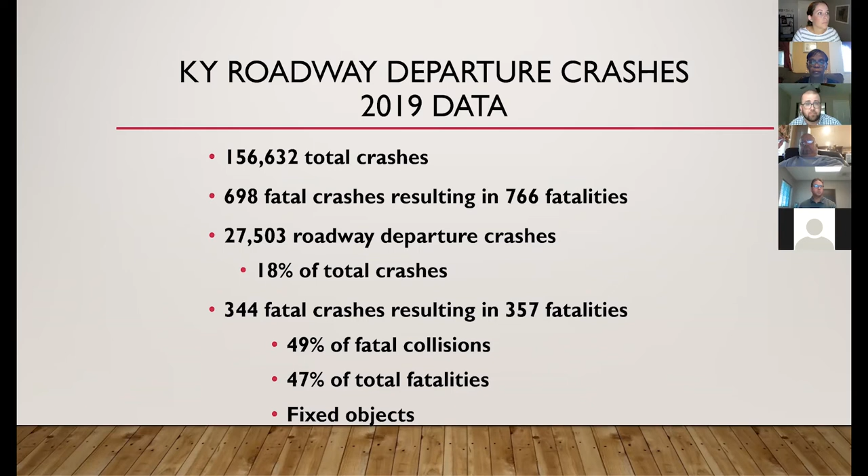However, 344 of those roadway departure crashes resulted in the loss of 357 lives. This accounts for about 49% of the total fatal collisions, as well as 47% of total fatalities. So this shows we have an overrepresentation of roadway departure crashes here in Kentucky. The number one thing people run into in a roadway departure event is a fixed object. These crashes are generally more severe because people are colliding with fixed objects.

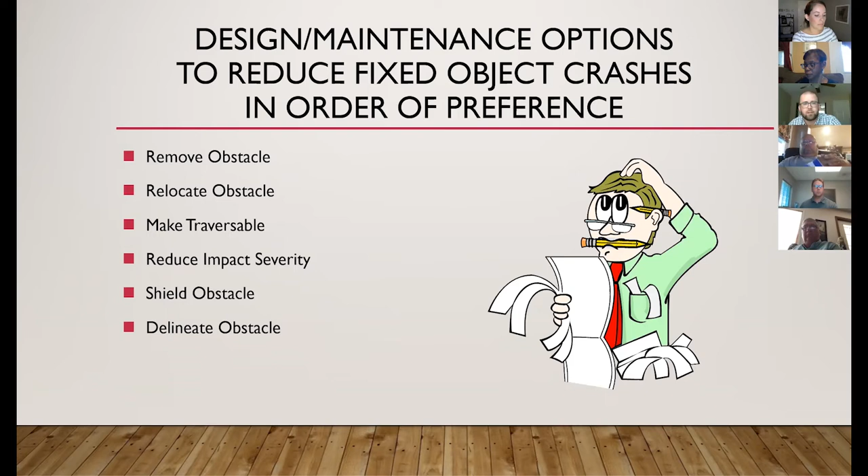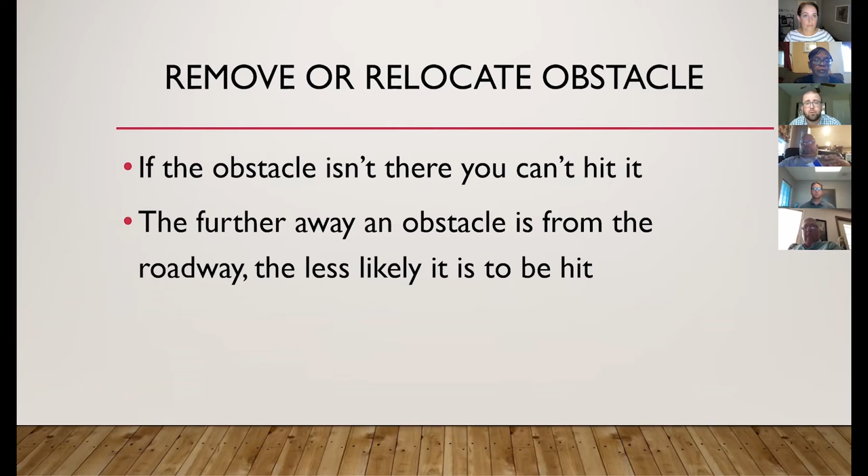So we have to do something to help with that situation. Here's some options we have to reduce those fixed object crashes, in order of preference. We're going to go through each one. First is remove or relocate the obstacle. Obviously simple and straightforward: if the obstacle isn't there, you can't hit it, so it won't be a problem anymore. And the further away you move an obstacle from the roadway, the less likely it is to be hit.

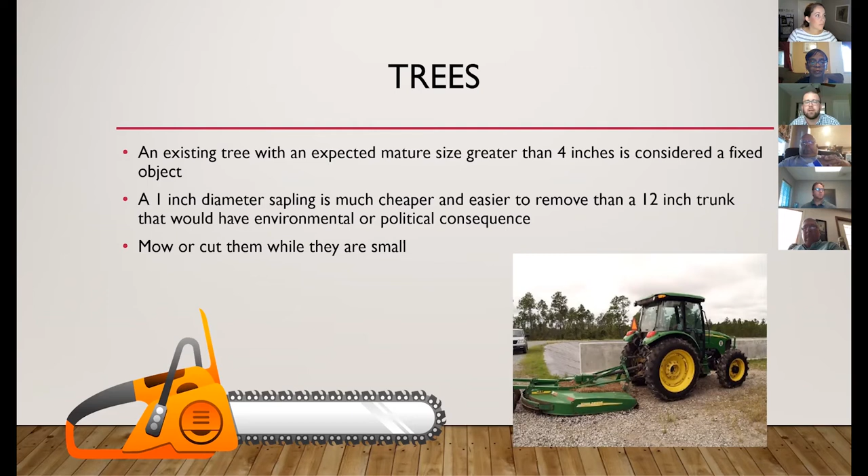What's the number one object that we hit here in Kentucky when we have a roadway departure event? Our beautiful trees that line our rural roadways. An existing tree with an expected mature size greater than 4 inches we consider a fixed object. Obviously, when you have a 1-inch diameter sapling, it's much cheaper and easier to remove than when that tree becomes a 12-inch trunk that may have environmental or political consequences.

So our recommendation, as well as KYTC's, is to mow or cut them down when they're small and it's no big deal. The next option we have is to make the roadside traversable. If there's got to be an obstacle on the roadside, build it so an errant vehicle can traverse over the obstacle without snagging or overturning. The general rule is if it's taller than 4 inches, it could be a snagging issue, and you need to either remove it or make it shorter than 4 inches.

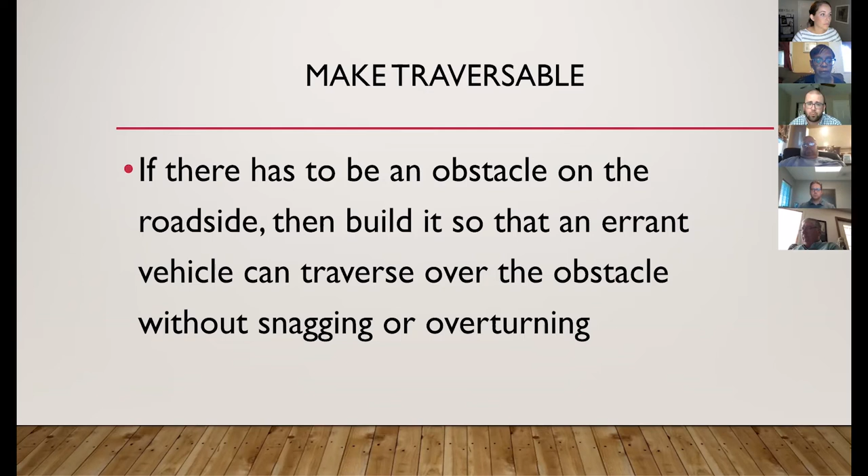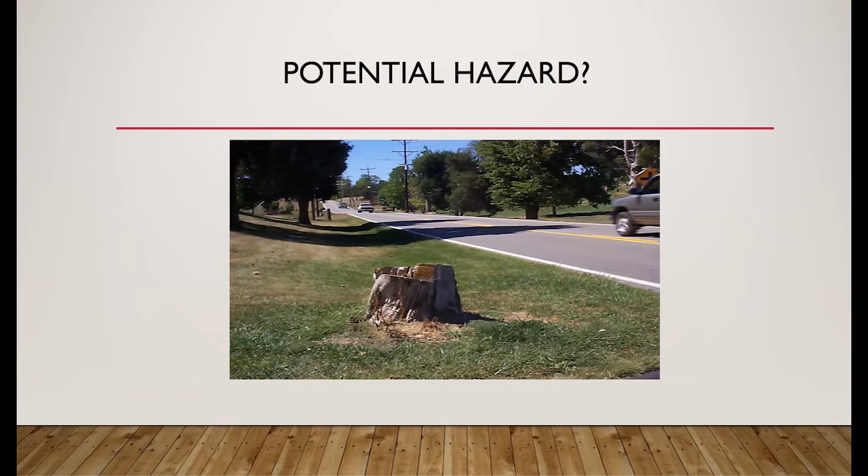We all have these on our roadways. We'll have a large tree that we want removed, and we need someone to come out and do that. When they do, hopefully they don't just leave a stump like this, which is much higher than 4 inches tall, still leaving a potential hazard on your roadside. If you remove a tree, be sure to grind the stump down to less than 4 inches in height.

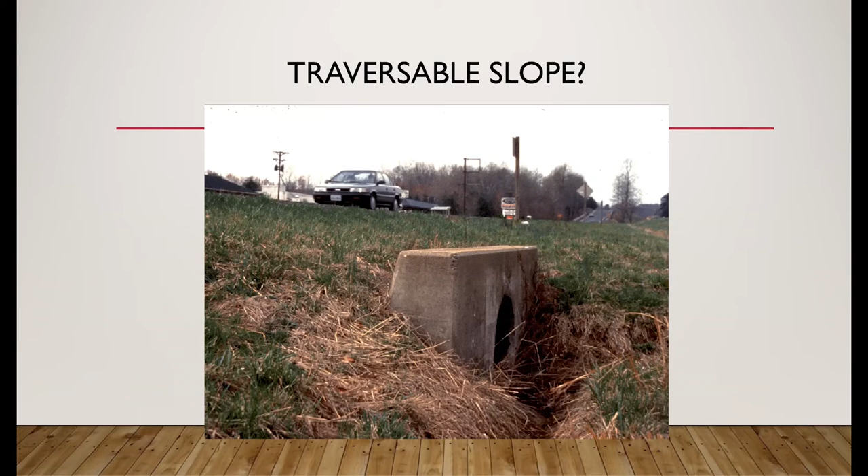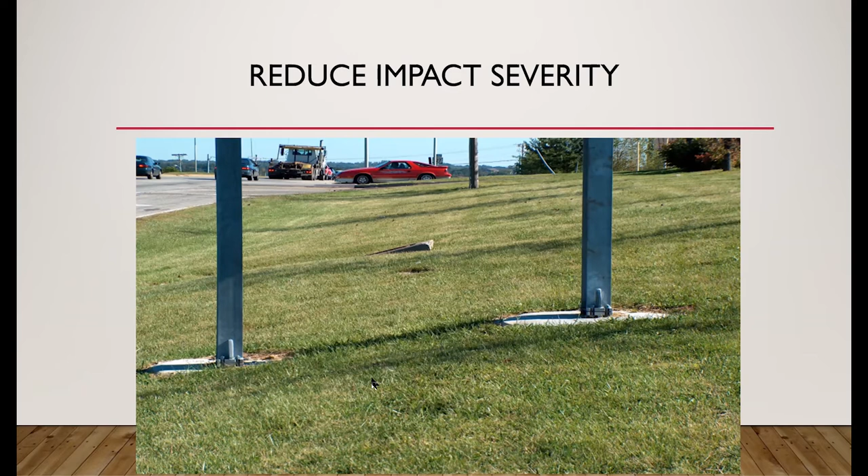But then you have this problem right here in the middle. If I move my cursor over it, you have a head wall right there behind it that looks to be taller than 4 inches. So you may be able to reduce the impact severity, but also look at the roadside as well to see if there are other things you need to do to make things traversable.

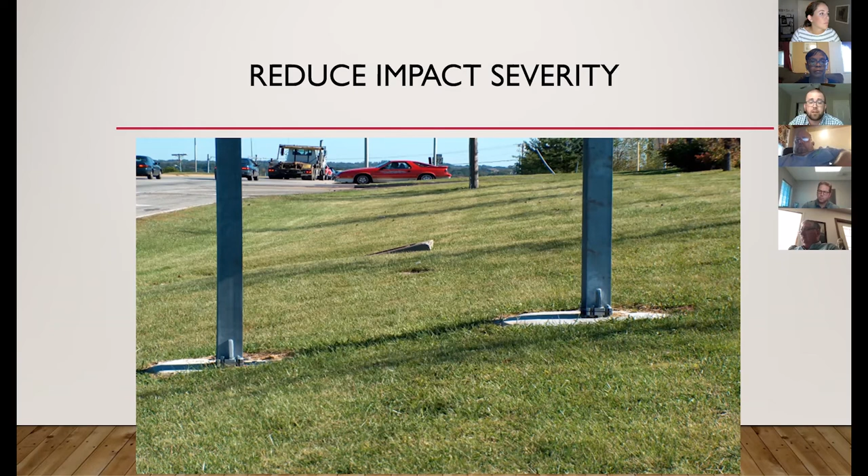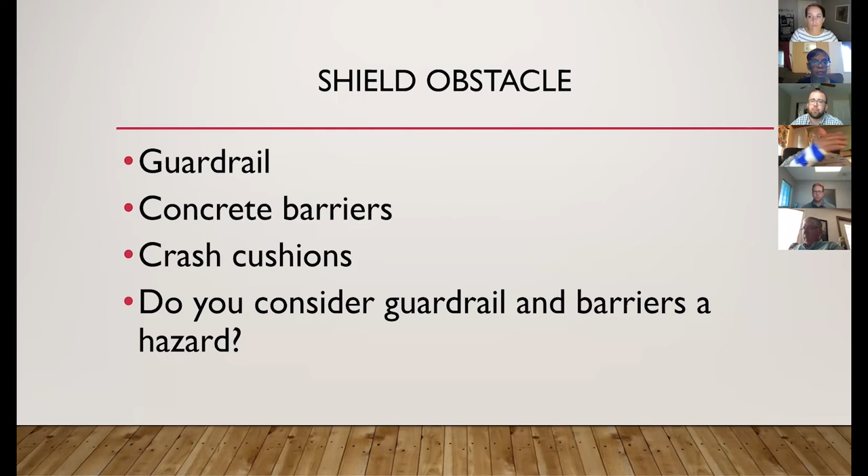The last option, if you can't do anything else, is to at minimum attempt to make the object more visible by putting a marker on it or some form of delineation.

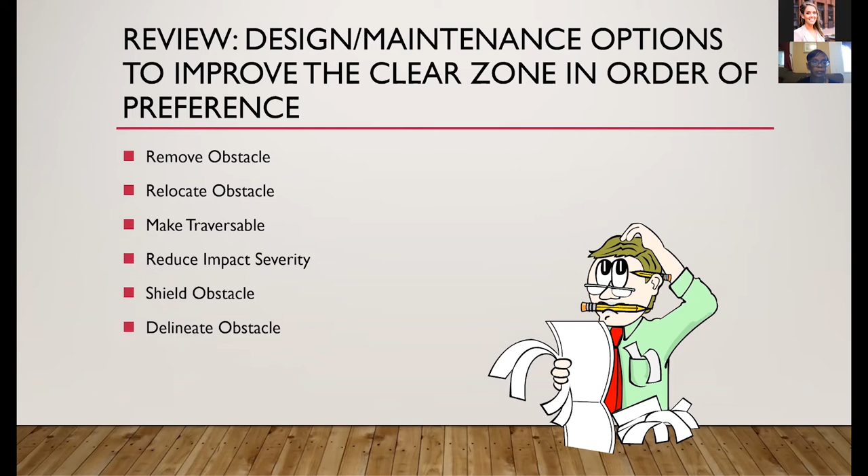Now, thinking about using barriers, one of the most important things when you're using barriers is to ensure that the distance between the barrier and the hazard is the distance that you need. And that's based upon what type of barrier you're using and what you're actually protecting.

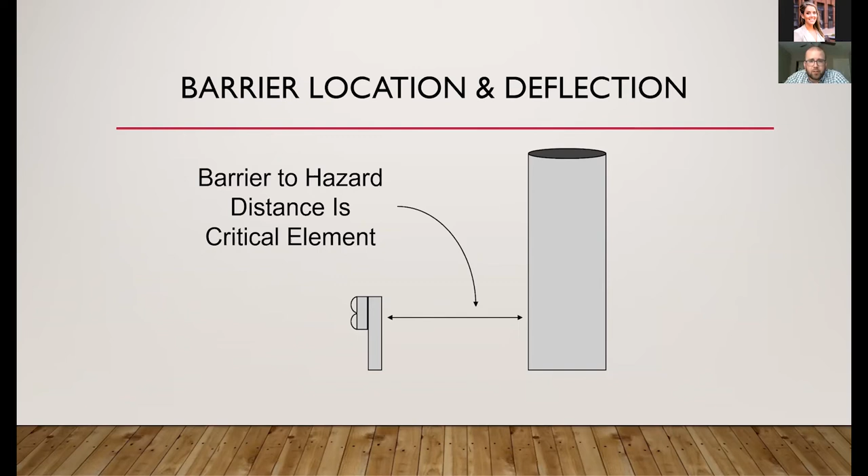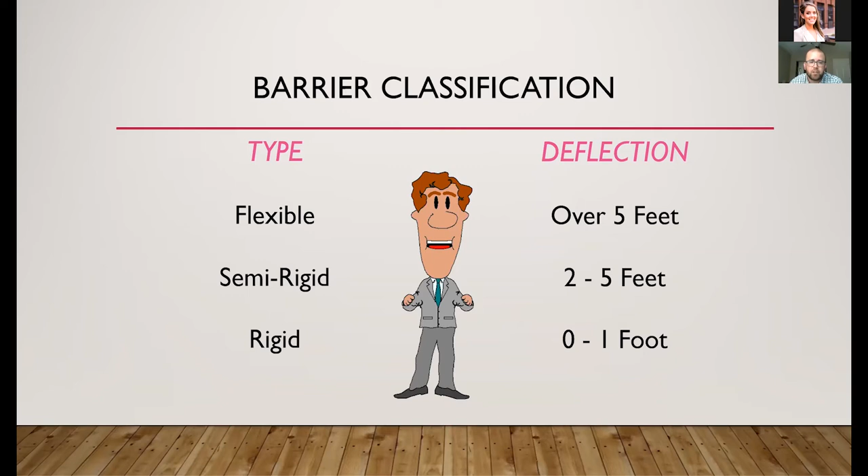So each barrier has a different deflection. These are the 3 types of barriers commonly used here in Kentucky. A flexible barrier has a deflection over 5 feet, sometimes up to 12 feet. A semi-rigid type has a deflection of 2 to 5 feet. A rigid type has a deflection of about 0 to 1 foot.

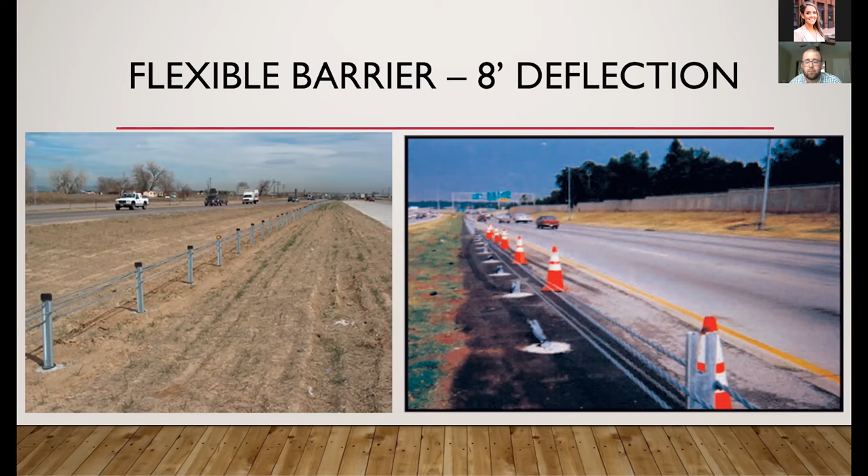Here's an example of a flexible barrier that everyone on our webinar has probably seen across the state of Kentucky. This is our cable barrier. We have this in the medians across the Commonwealth and on lots of our interstates, as well as some of our parkways. Here in Lexington, where I live, we also have it on New Circle Road. It's very common, with a design deflection of up to 8 feet, sometimes 10, sometimes even 12. So that's something to be aware of if you're looking to use that.

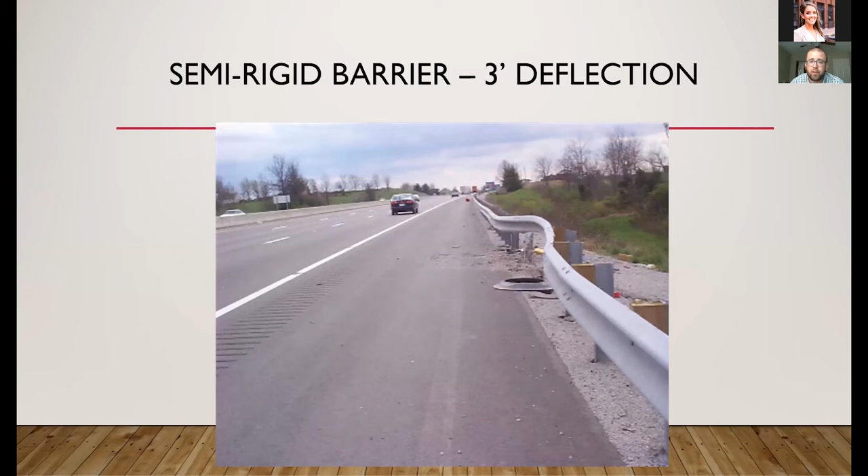Semi-rigid barrier is what we call our W-Beam barrier. Our standard W-Beam barrier has a deflection design of about 3 feet, so we need to be aware of that when using it out in the traveled way. And last but not least, the rigid barrier, which is our concrete barrier behind our crash cushion here, has a deflection of about 0 to 1 foot. So that's very rigid and not very forgiving.

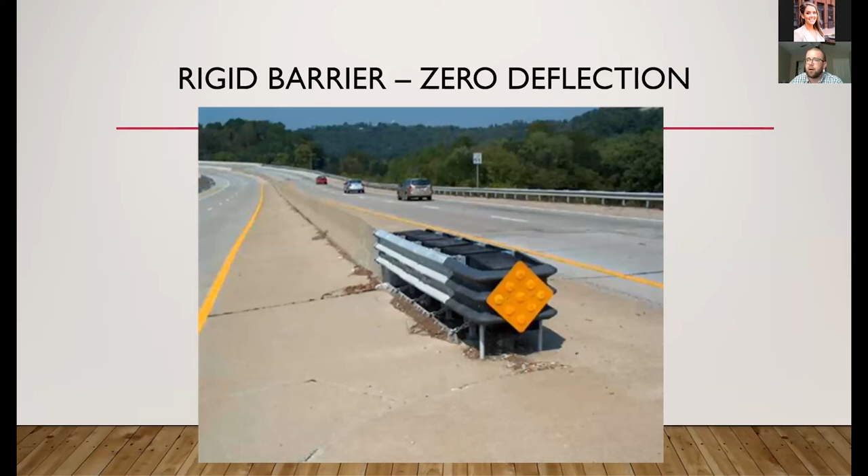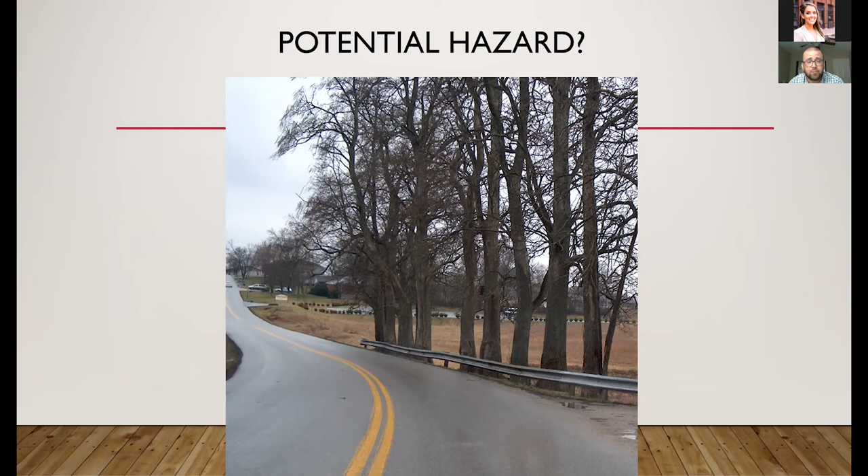Now thinking about all these deflections we just talked about, can anyone see a potential hazard in this picture? It's probably a little difficult to see, but we have a string of guardrail right in front of a line of trees. If the trees are immediately behind that guardrail, which appears unanchored and not a very strong string of guardrail, it may actually deflect more than the 3 feet we designed for. So if someone hits that guardrail and it deflects, it may deflect right into those trees, causing a severe crash or maybe a fatality. Obviously, that's not what we want.

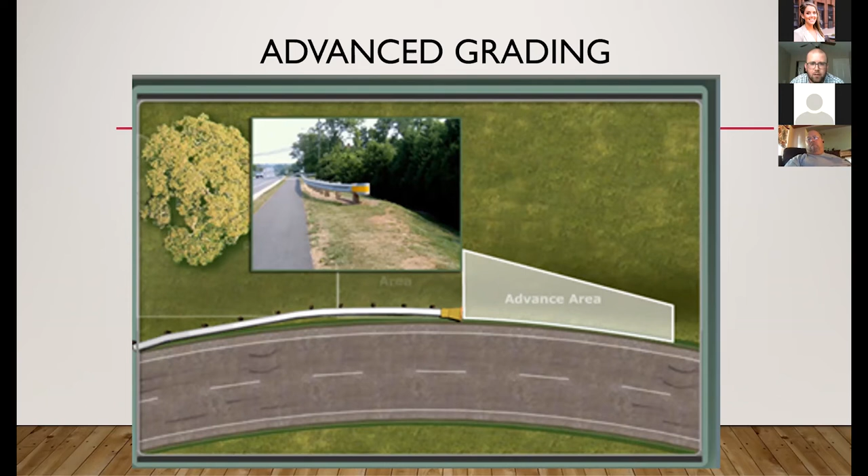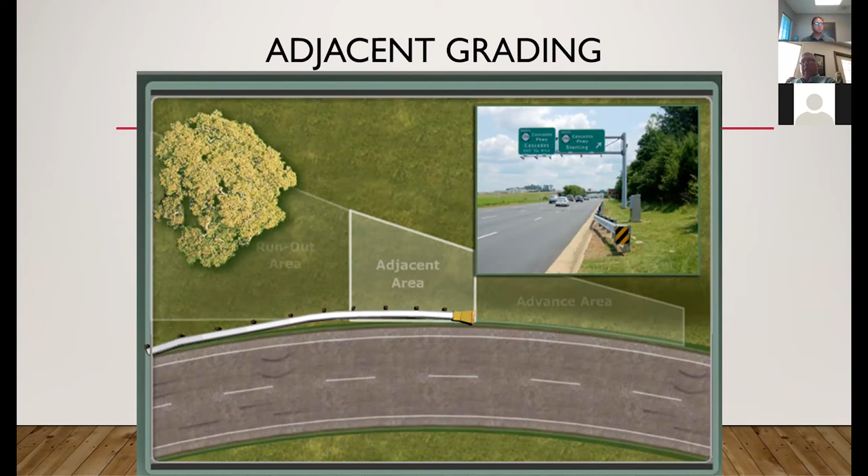Now, adjacent grading refers to the area on which the terminal is installed and the area immediately behind it, as highlighted here. Ideally this area should be essentially flat as well, 10 to 1 or even flatter, so the terrain itself does not increase the vehicle's roll, pitch, or yaw upon impact and interaction with that terminal. You want to make sure that's as flat as possible.

Hey Ryan, yes? Comment in the chat here. Okay, David says: we have observed Alabama DOT utilizing quick deployment water-filled barrier to shield damaged guardrail sections until crews can mobilize to repair the damaged guardrail.

Would KYTC be open to exploring this quick and temporary positive protection mitigation method? That's a very good question. I've seen across the country many different states that do very similar things. Indiana does something similar as well. I'm not sure about Kentucky's stance. Right now I think what they currently do is put out some orange barrels, just to delineate the situation and make sure people know there's been a guardrail strike there, and the guardrail may not respond in the way it's designed to. I can speak with construction as well as maintenance about that and see if they have any thoughts on that, or if they've been interested in the past. That's a good question, I'll look into that. Thank you.

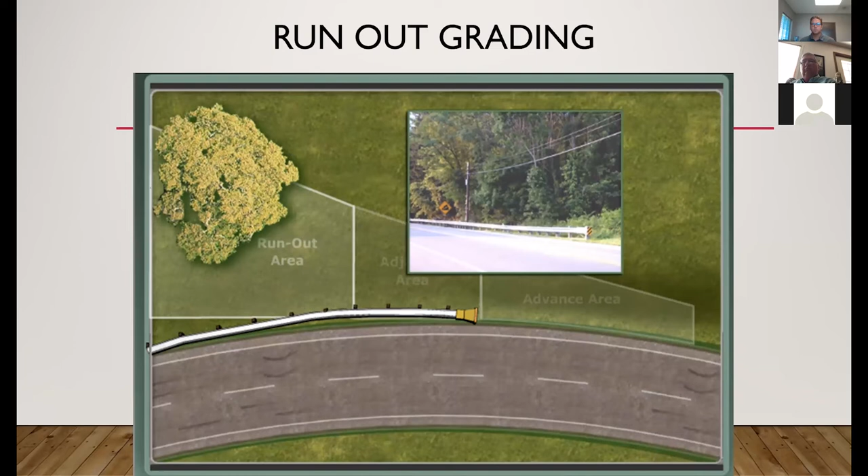Looking again at the runout grading, this refers to the area into which an impacting vehicle may travel after breaking through a gating terminal. If they strike the terminal within the first post or two, the design allows it to gate and open up, letting them travel safely behind the string of guardrail. The physical extent needed varies depending on vehicle size, speed, impact angle, driver reaction, terrain character, and terminal type. You want this area to be as large, flat, and free of objects as possible, because you never know which type of vehicle will hit your guardrail.

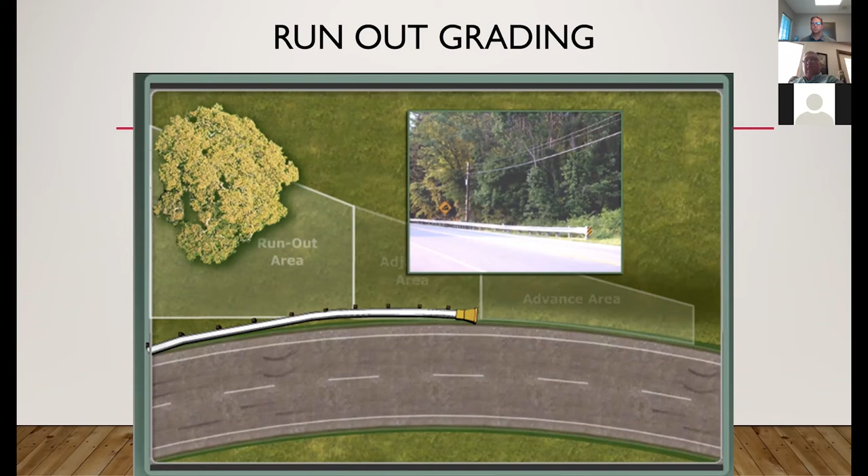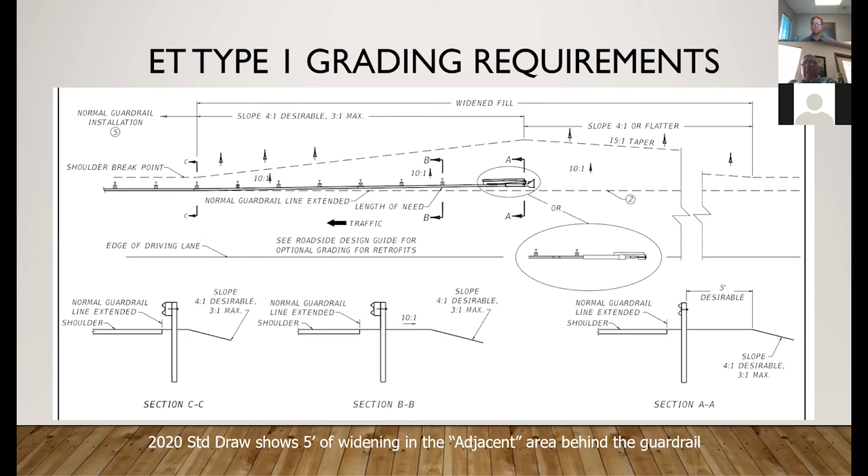Looking at the grading requirements for the end treatment type 1, the tangent end treatment terminal for KYTC, this is their standard drawing. In the advanced area, you have your 10-to-1. In the adjacent area, you also have 10-to-1. And in the runout area, it says desirable slope 4-to-1, 3-to-1 max. Making it 4-to-1 means it can be recoverable. 3-to-1 means it's traversable but not recoverable, so it should not cause a vehicle to roll over or cause another crash.

Same for type 4. You have 10-to-1 in your advanced, 10-to-1 in your adjacent, and again for your runout, 4-to-1 desirable, 3-to-1 max.

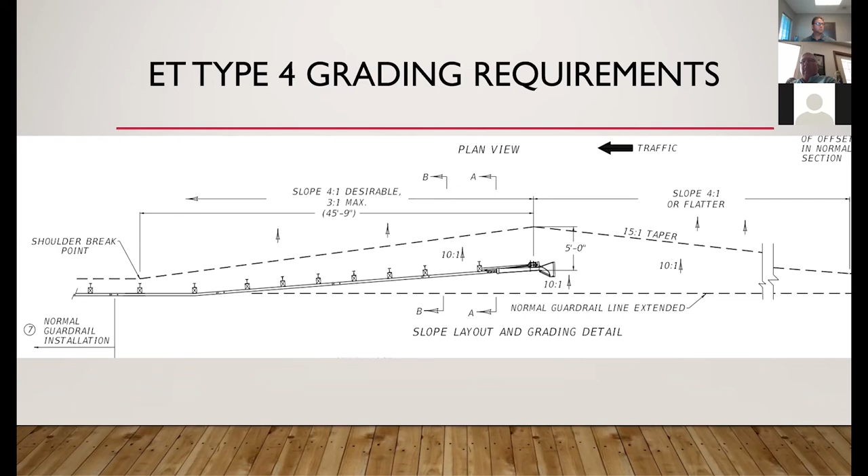Now, a lot of questions I've received from other people who went through similar training with me: there are lots of places across the state where we cannot get this grading. It's very difficult in mountainous areas and areas without much shoulder, where you go directly into a ditch. So the question is always, what should we do in that instance? The answer is just do the best you can. You want it as close to the design and standard drawing as possible, but it's understandable if it's not entirely able to be built up that much. You just want to do the best you can with what you have.

Now looking at the minimum length of guardrail, there are several statements across many different standard drawings for KYTC, and they all have a similar note: minimum length of guardrail, including the end treatment preceding a fixed object, is 200 feet. Why 200 feet? Because guardrail needs about 100 feet of anchored rail to build up enough tensile strength to withstand a crash. So the thought process is, when you have 200 feet, you could strike that guardrail anywhere and have at least 100 feet in one of the two directions, upstream or downstream, that would be able to withstand the crash. That's why we have 200 feet.

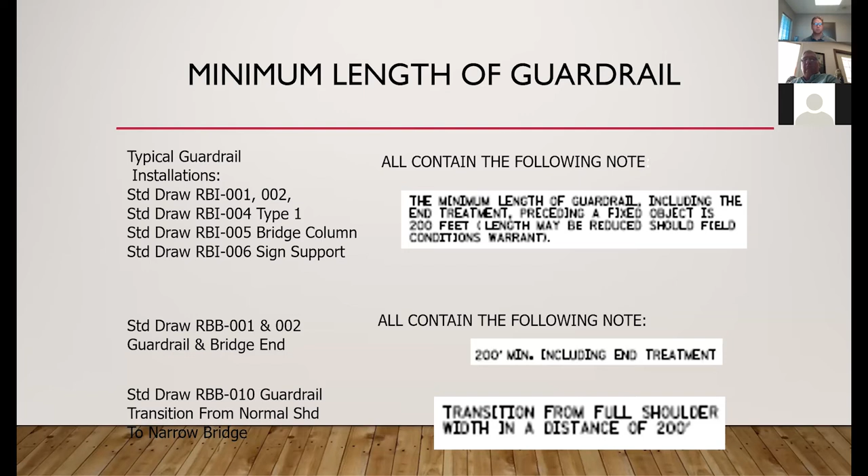I highly encourage not only KYTC to continue following this, but other jurisdictions as well. You need at least 100 to 200 feet to withstand a crash.

Now, looking at our end treatments, there's an order of preference of guardrail end treatments that KYTC uses. The first or most preferred is the type 3, barrier anchored on the back slope, or the type 2, which is barrier against a solid rock face. These eliminate end-on impacts. They're both generic, non-proprietary materials.

The next preferred is the flared end treatment, the type 4A. It's flared away from traffic and is a gating end treatment. The last is the straight line or tangent end treatment, the type 1. It's energy absorbing and closest to the roadway.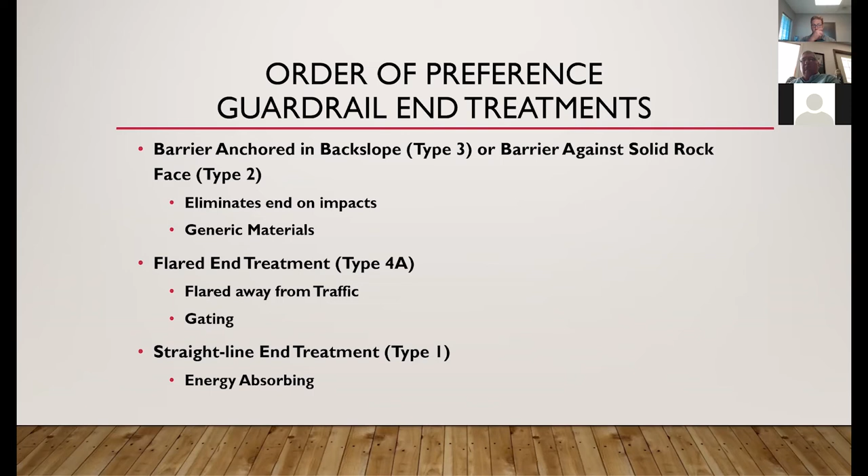The reason these are in this order: the ones on top are furthest from the roadway, meaning they're least likely to be hit and least likely to need regular repair. A type 1 is sometimes only a few feet from the edge of the shoulder, while a type 3 or type 2 could be up to almost 50 to 100 feet away from the shoulder edge. That's why these are preferred—they're much easier to maintain because they're further from the roadway and won't be hit nearly as often.

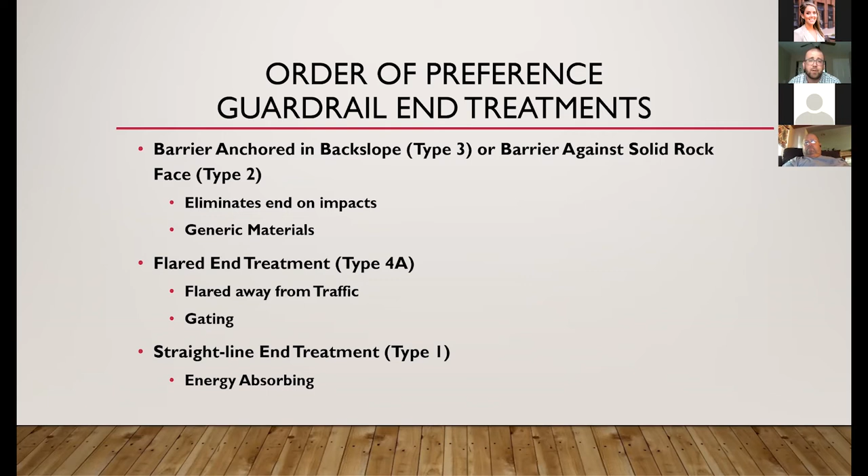With that, I think we had a poll question here, Nicole. I don't know how to see those answers, Nicole. You want the question? I'm sorry. I'll share the results with you once they're done. Can everybody see the poll question? You're talking about the MASH question? Yes, on question 1. Oh wait. Janet? Here we go, I can see it. Okay.

This is the next thing we're going to talk about, MASH. It's the Manual for Assessing Safety Hardware, and it's new requirements that we have for crash terminal or end terminal crash testing. So I kind of wanted to gauge everyone's experience with that, if they've actually heard of it and have used it or looked into it at all.

Okay, so we've got a lot of people that have at least heard of it. This is good, this gives me a pretty good idea. So we've got 2/3 of the people have at least heard of it. So that's good, I can work with that. Thanks, Nicole, for putting that up there. I appreciate that.

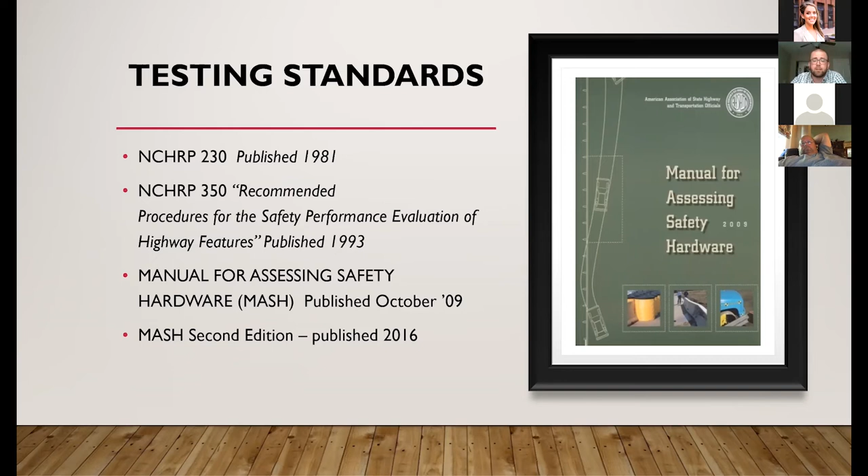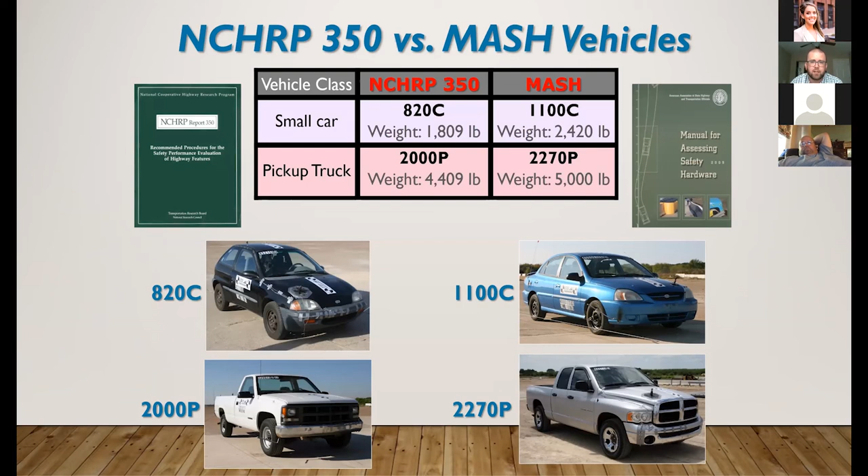On your screen now, you should be able to see a slide showing the difference in sizes between the small car and the pickup truck for NCHRP 350 testing versus the new MASH testing. As you can see, the vehicles on the left for NCHRP 350 are much smaller, they weigh less, they're closer to the ground. The vehicles on the right, even the passenger car, are significantly larger and heavier, as well as the pickup truck. The pickup truck is now a 4-door pickup truck, as opposed to 350 which was only a 2-door. So that's another major change as well.

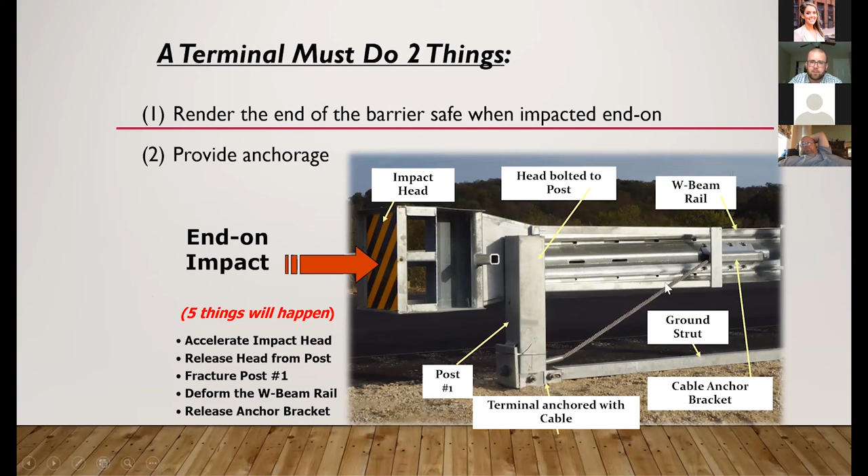So the big question, what are we testing when we do these crash tests? When we crash test an end terminal, we're making sure it does two things: render the end of the barrier safe when it's impacted end on, and provide anchorage. Anchorage gives it the additional strength, provided by the cable you can see in this picture down here. This is called the terminal end cable.

Test 34 is your critical impact point test. This is where it's striking right near the end terminal, not head on, but at a 15-degree angle. So this is going to test the ability for the end terminal to gate and what happens when the vehicle hits it that close to the end terminal.

Test 35 is a 25-degree angle that's striking at the beginning of the length of need. This is really testing your anchorage, the strength of your system, the strength of your end terminal.

Test 37 is the opposite direction strike at a 25-degree angle as well. It's testing what happens when it's struck in the opposite direction. Will you have any snagging? Will you have any issues? What will happen?

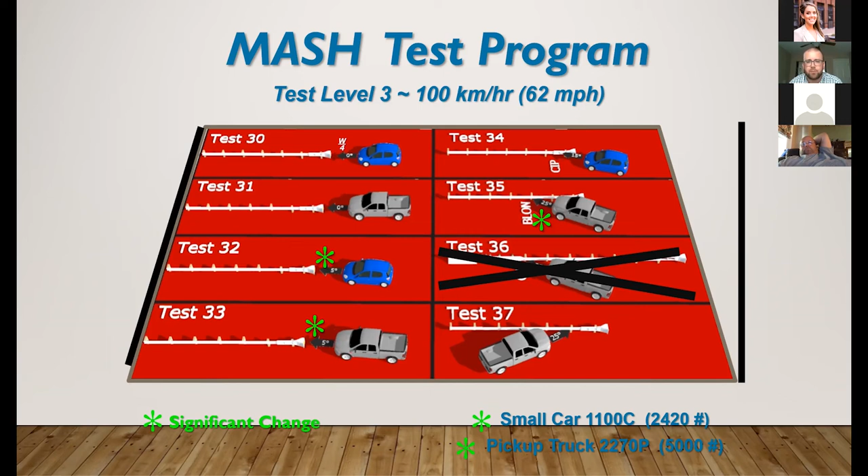It did not cover existing master agreements or maintenance efforts that were underway at that time. However, the implementation agreement did strongly encourage state DOTs to upgrade or replace their damaged hardware with MASH-approved hardware through maintenance and state force efforts.

Now, I know this is only specific to state DOTs, and I know we have other jurisdictions, locals, and others on our webinar today. What I can stress or encourage you all to do is to upgrade your guardrail as well, so that we have similar systems between the state system and the local system.

We know that along several roadways across the Commonwealth, we have guardrail that's rather low or that has been used past its useful life. If you have any guardrail like that in your jurisdiction, I recommend reviewing it to see if it needs to be upgraded.

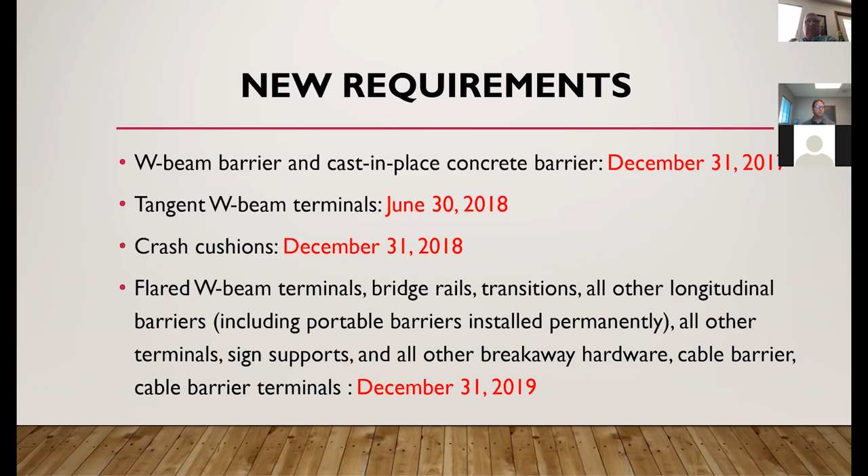This simply means there are new testing requirements, and if your guardrail is at least 27 inches in height, it probably is still working the way it is designed to do. That is based on the Highway Design Manual, and the Roadside Design Guide makes that same statement. So if it's at least 27 inches tall, it should still be able to function the way that we need it to function.

Federal Highway started to track how well states were working with these new implementation dates. As you can see, as the implementation dates got later, there were many more issues with state DOTs, whether or not they felt they were going to be able to meet those sunset dates. The last sunset date of December 31st, 2019, which covered everything else not covered in previous sunset dates, states had the most issue with.

So there were lots of questions that came out from that.

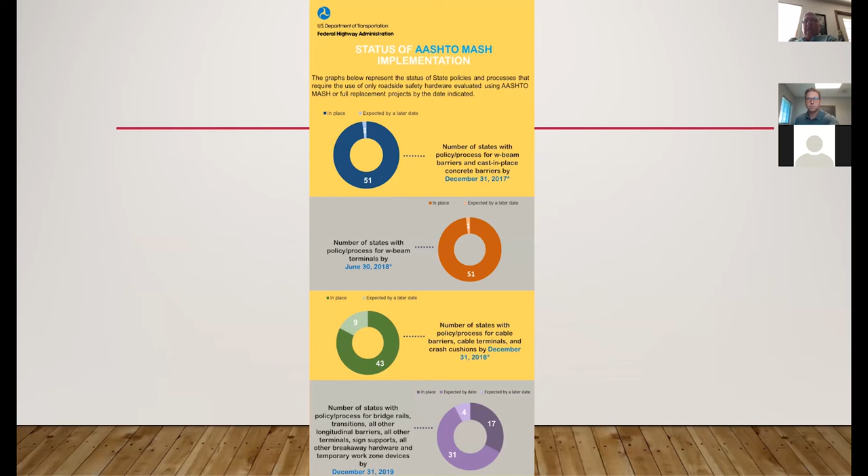Because there were so many questions and concerns, there was actually a Q&A website put together by AASHTO. This gave state transportation authorities the ability to go to a website to look up their concern and ask more questions. You can also submit questions through this website. It gave them the ability to find out what they should do in their situations.

With that sunset date, December 31st, 2019, the major issue many states had was a very limited number of MASH 2016 compliant devices available in several of the listed categories. Some of the existing compliant devices may not actually meet the requirements and needs of the transportation authorities. So AASHTO and FHWA worked together and created some exceptions to allow some MASH 2009 compliant, as well as NCHRP 350 compliant devices, to be used in their place.

I had a question to ask here, and I think we have enough people aware of MASH, so we could ask this question. So Nicole, if you have that question available, would you mind asking that for me?

Right, let's see here. Oh, wait.

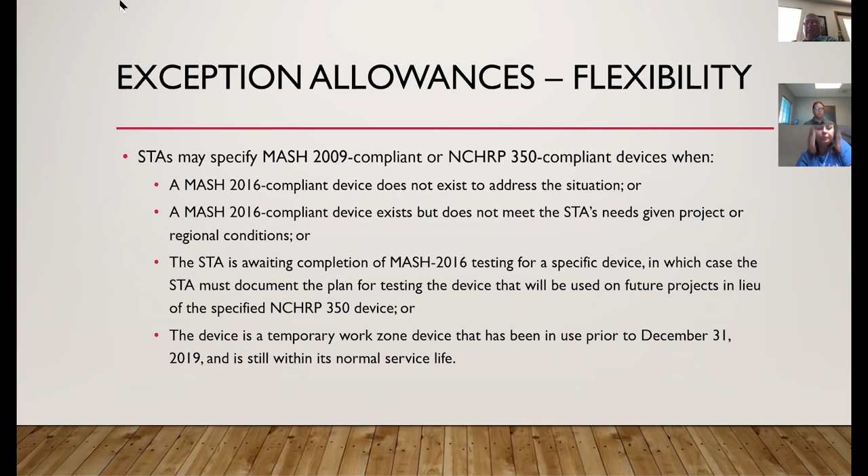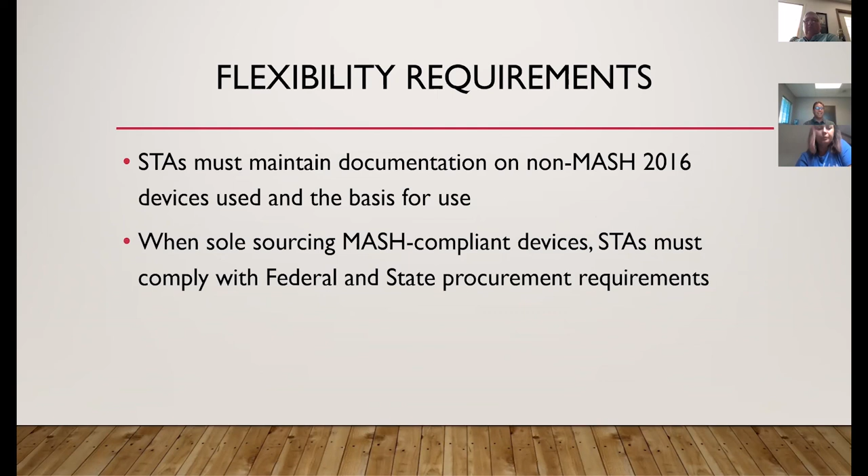Let's go back to our presentation. Along with that, there were some requirements that came with these flexibilities regarding required documentation and other things people have to do when using MASH 2009 or NCHRP 350 devices. I'll make sure everyone can get a copy of this presentation if they want it so they can see all this information.

So let's get into what KYTC did in response. How did they respond to these changes with MASH? The first thing they did was send out a state highway engineer memo in November of 2017, where they made the decision to switch from their strong post W-Beam Guardrail system to using the Midwest Guardrail system.

Midwest Guardrail system is rail that is at 31 inches high. KYTC's old standard was at 29. It has a 6-foot post length, spaced at 6'3", the same as KYTC's previous strong post W-Beam system. It has 8-inch offset blocks instead of 6-inch, meaning your posts are 2 inches further away from the roadway and vehicles, giving a lesser chance of tires and wheels snagging on guardrail posts during a crash.

The splice location changed. The splice location is where the two panels of guardrail connect. On the old strong post W-Beam system, they did that at the post, which created the point of greatest strain and stress at that location, weakening the system and making it more likely to tear there. Changing the splice location to mid-span instead of at the post makes the system stronger and gives it greater ability to withstand crashes.

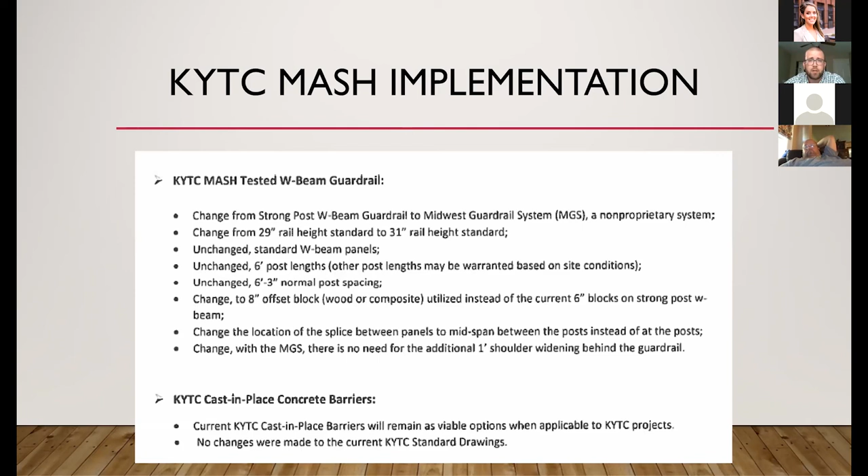The Midwest Guardrail system also does not have that requirement for an additional 1-foot shoulder widening behind the guardrail. So it's a stronger system and gives greater strength when you have a crash.

These are some of the reasons I just went over: mid-span splices, reduced post embedment, meaning you don't have to spend as much time on installation or drilling posts in. Increased mounting height, now up to 31 inches instead of 29. Increased blockout depth. The standard design can be used in a wider range of applications, not just your standard situation. When you have different situations with curbs and other things, you can just use your standard design without changing anything.

Also, there were current end treatments already in place that KYTC was familiar with, which they could use with the Midwest Guardrail system as well.

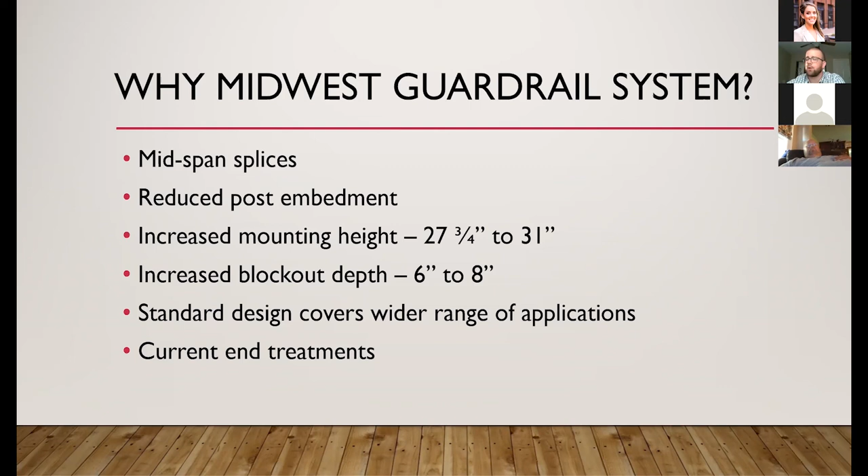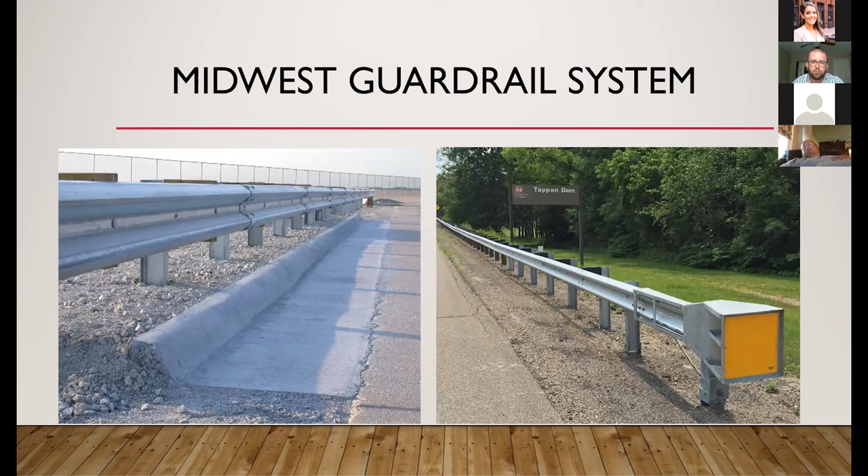Here's a couple pictures of the Midwest Guardrail system. The picture on the left shows one of those applications where it's a non-standard situation, but you're still using your standard design with that curb. On the right, it's just a standard installation with a tangent end terminal, type 1.

Here's a standard drawing showing many of the things we talked about before. You can see your mid-span splice location, the 31-inch height, as well as different blockout sizes.

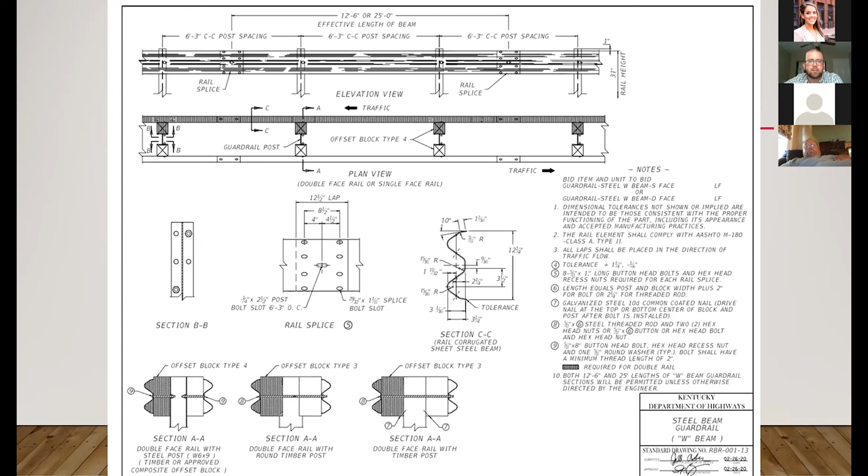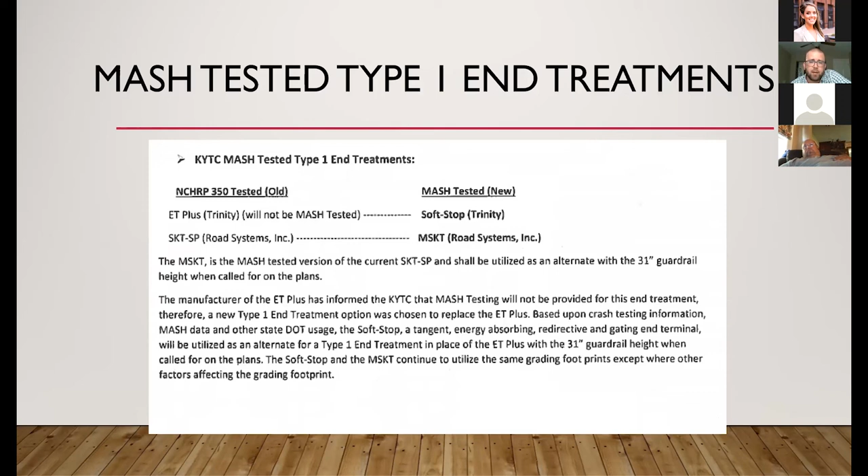What did KYTC do for their type 1 end treatments? They changed them. Used to be ET Plus and the SKT. They moved on now to make the SoftStop and the MSKT their tangent, or type 1, end treatments.